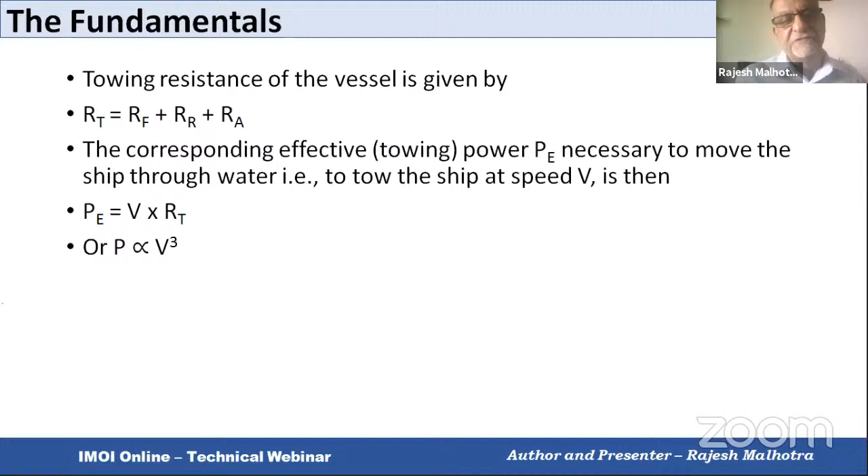You'll note from this that all curves plotted of power versus velocity will always be hyperbolas, never straight lines. We'll come to that later, but this is where we start - these are the fundamentals. Now we come to the proportions of the various resistances depending on the speed of the vessel. This is where it becomes clear that as the speed of the vessel rises, the proportion of wave and eddy current friction rises disproportionately. That is why the speed of the vessel is central to any discussion on power and propeller design.

For very high speed vessels - like hydrofoil craft - the propeller and hull design need to be totally different because they are high speed. In a high speed vessel, the wave resistance increases exponentially. As you can see, in a low speed vessel, frictional resistance forms 90%, while in a high speed vessel, frictional resistance is only 45%. The wave resistance changes dramatically as the speed of the vessel increases.

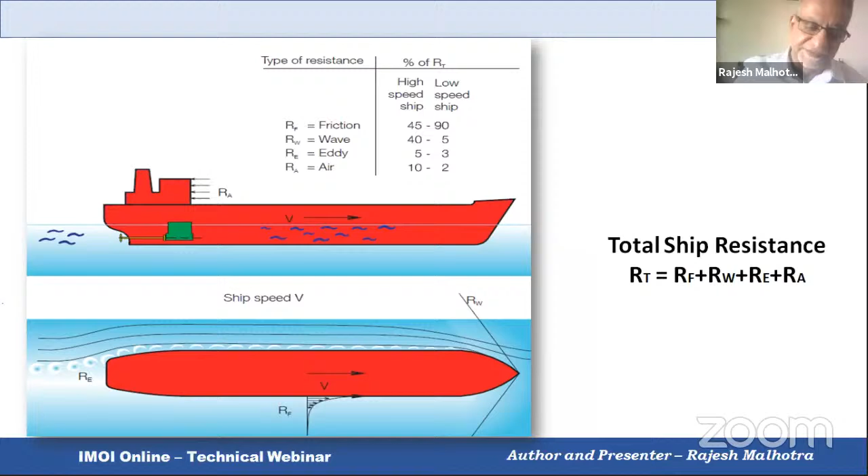Now this leads to something called a wave wall. If you see what happens here - if I increase the speed of my vessel - believe me, this is an actual 600 TEU container vessel. For a speed of 15 knots, the power requirement is only about 2,500 kilowatts. If I increase the speed to 17.8 knots, just an increase of 2.8 knots, the power requirement almost doubles. And if I increase it closer to 20 knots, even higher than 17.8 knots, no amount of increase in power is going to increase the speed of the vessel.

This is known as the wave wall barrier to ship speed. The only way to increase the speed of the vessel is to change the hull design, or what is known as the lines of the vessel. The underwater design of the vessel needs to be modified if you want to increase the speed, because whatever power or velocity you increase, the additional power is just going to overcome the wave resistance - it is not adding to the velocity of the vessel.

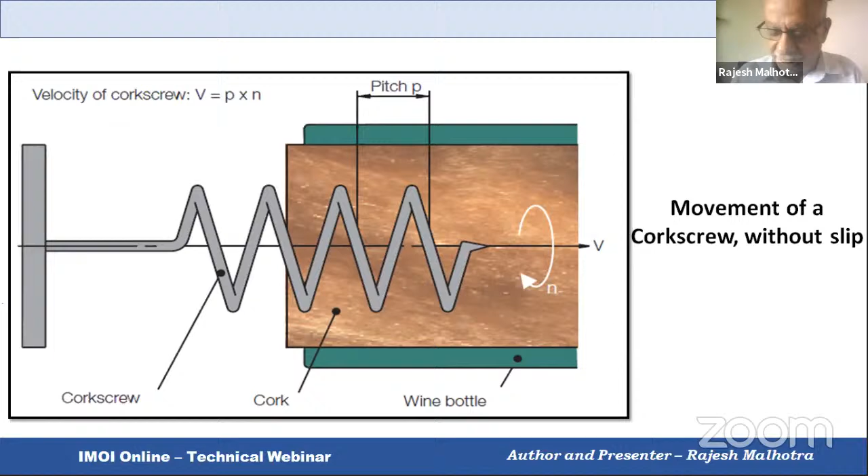Now I come to something which happens while the ship is in service. During propeller model testing and during sea trials, the condition of the hull and the propeller is that they are normally completely clean and smooth, there's no fouling on them. Also the condition of the sea during the trials is always calm sea. I mean, we always choose calm sea. No one does sea trials in sea of Beaufort more than 3. So this is what the situation is.

But in actual service, what is going to happen is that the hull is going to get fouled, the propeller is going to get fouled, you're going to get rough weather. Now, fouling and rough weather both have a certain effect on the ship speed, on the propeller speed, and obviously then the power developed by the engine.

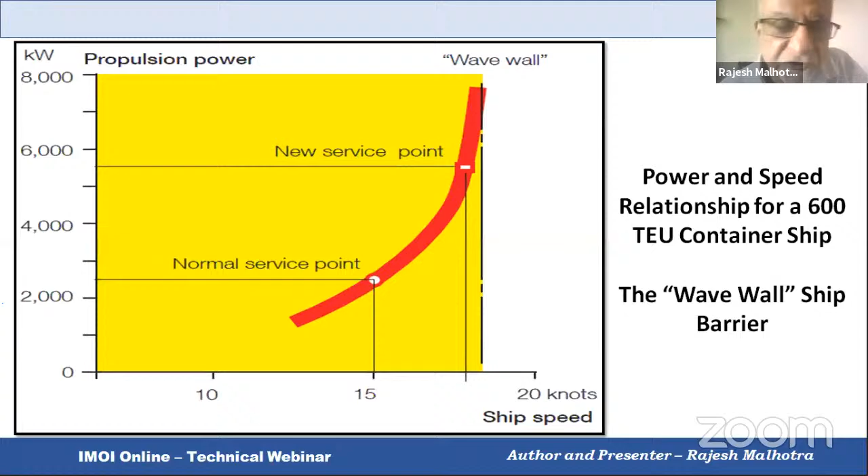Now, the general thing is what happens to this curve. Let me just go back here. Okay, what happens to this curve in rough weather, and when your hull is fouled and your propeller is fouled, is that this curve is going to move to my left. That means to maintain the same RPM, I would need to require higher power. Or if I'm delivering the same power, then the RPM is going to drop. That is what happens in rough weather or when your propeller and hull get fouled.

This is important to remember, that the curve is going to move to the left, because a ship with fouled hull will consequently be subject to extra resistance, which will give rise to what is known as heavy propeller running conditions. That is, for the same propeller power, the rate of revolutions will be lower, or to maintain the rate of revolutions, you would need to deliver a higher power.

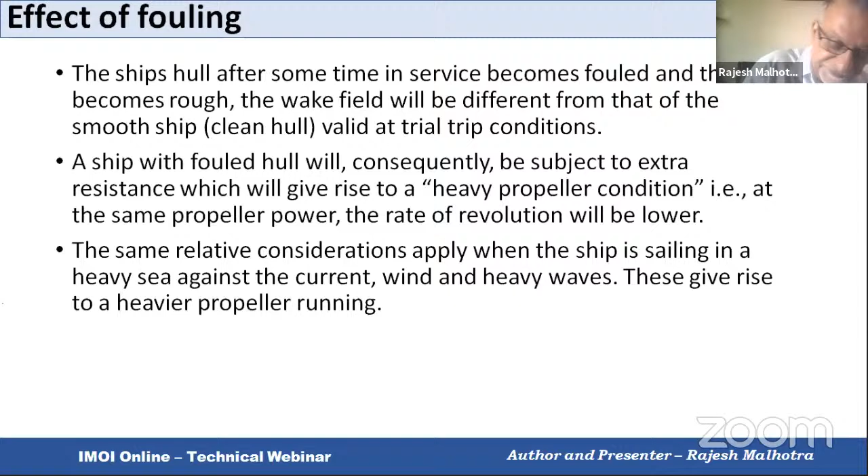And whether it is rough sea or it is fouling, the effect on the propeller, ship speed, and engine are identical. So these are actually treated the same way.

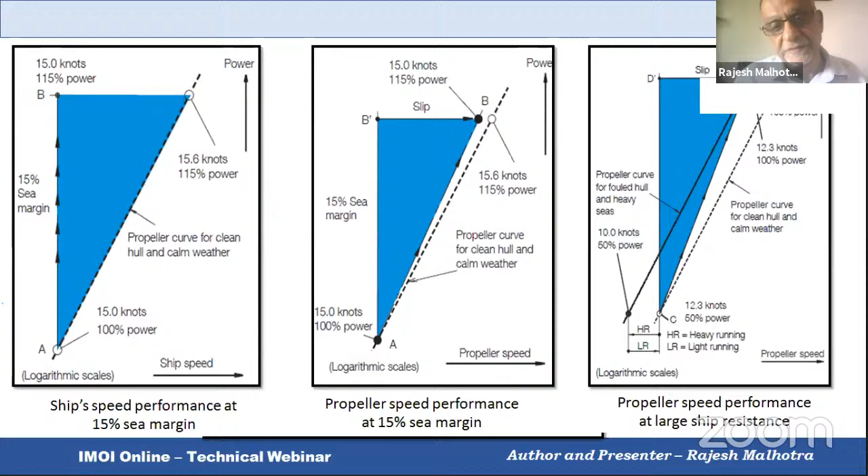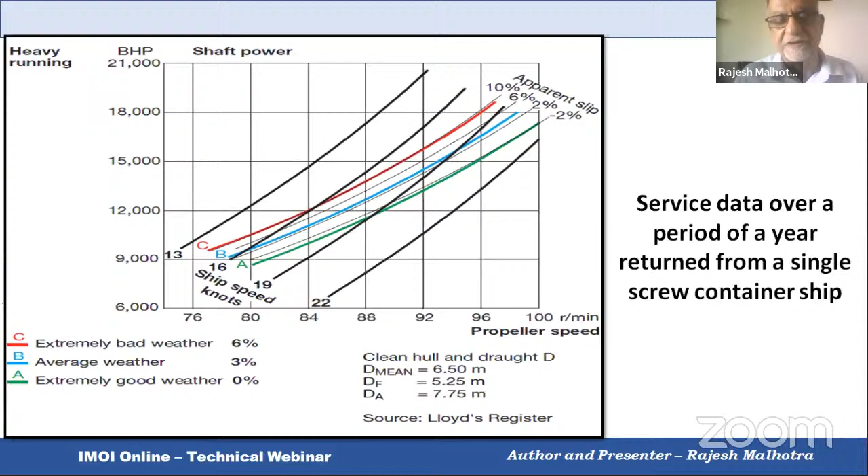The reason I put this slide here is to impress that actually all these lines would be curves, but we will be actually from here on dealing with straight lines, because we are going to use log scales. Now we actually come to part of the topic for the day: what are engine layout and load diagrams.

Actually, the power produced by any given engine depends on a constant - you all know the formula. The constant here is your stroke length and bore, and your mean effective pressure and the RPM. So the two variables in this formula are your mean effective pressure and the RPM. Now, the engine manufacturer has the freedom, from a given engine, to change both these parameters depending on the kind of service the owner wants.

He can either change the mean effective pressure, that would change your power, keeping the RPM the same, or he could change the RPM. Obviously, lower RPMs are preferred, especially nowadays where your propeller efficiencies and other things depend on having a lower propeller RPM. So you would like to have a lower propeller RPM, but in that case, to achieve the same power, you would need to increase your mean effective pressure.

Now, also, as per the propeller law, for engines coupled to a fixed pitch propeller, your brake horsepower is a constant multiplied by N cube.

That is your RPM cube, so that will be a hyperbolic curve. Your engine is actually directly proportional to the RPM, while your propeller is actually proportional to the cube of the RPM. So in general, what we can say is that the power is equal to a constant into n raised to I.

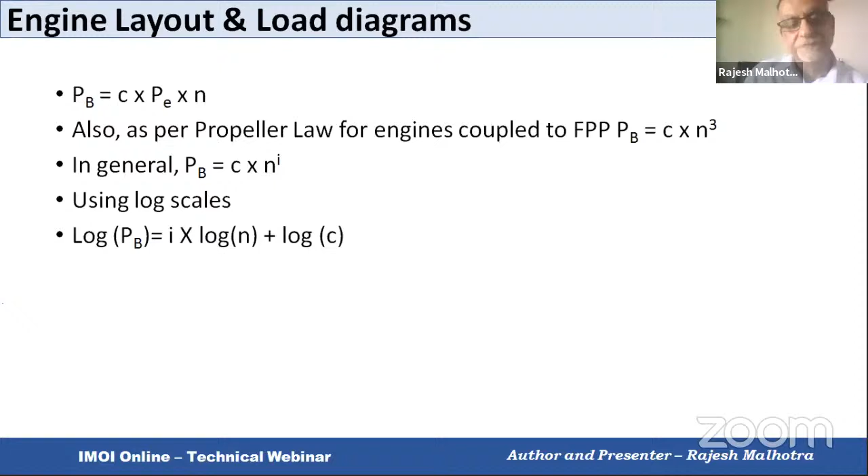Where I can vary from, say, 0 to 3 to 4, whatever you want. But if I use a log scale, then it becomes a straight line: y is equal to mx plus c. So whatever was the exponent I there, it would actually come as a figure for your x. Or it would come as a here. So this is what it is.

We are going to use straight lines and linear scales, the reason being it's easier to work with them, at least for me. What you must understand here is when I is equal to 0, that is n raised to 0, you would get a straight line parallel to the x-axis. When I is equal to 1, you get a straight line parallel to the line shown there. When I is equal to 2, you get a straight line parallel to the line shown as I equal to 2. And when I is equal to 3, you get a straight line parallel to I equal to 3.

So the point here is that your propeller curve will actually be parallel to the line I equal to 3, because it is n raised to 3. And your engine power curve would be parallel to the line I equal to 1, because in our plan equation it is n raised to 1. This is what is important when we start using log scales.

This is how we get the lines - which line is parallel to which one. You must remember that your propeller line will always be parallel to I equal to 3 generally, though it may be somewhere between 2 and 3. And the important thing is that your engine line will always be parallel to I equal to 1, because in your formula, n is raised to 1, right?

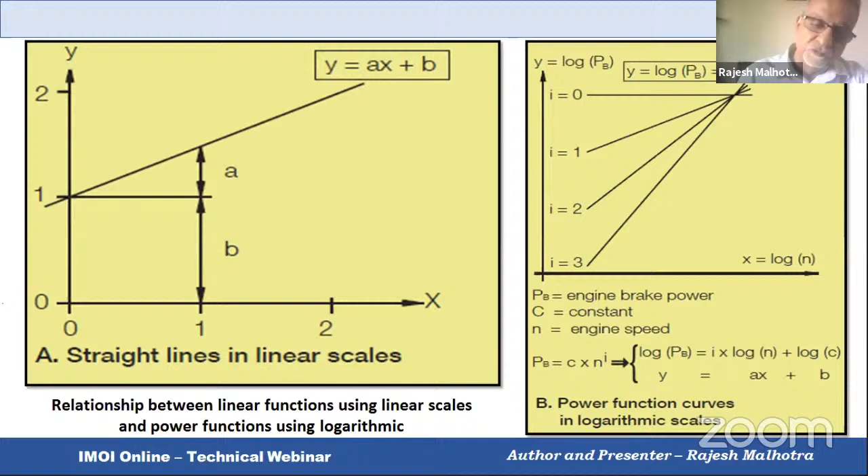Now we come to actual engine layouts. Before I start on the layout, let me explain something about how MAN B&W number the engines. For example, this is MAN B&W S70 MC-C8, Tier 2. Basically anything and everything to do with the power of the engine is in the specification. S is a super long stroke engine - if you look up your manual, you will know the stroke-bore ratio of your engine. S denotes a certain stroke-bore ratio.

Now 70 is the bore of your engine, so this is where we get the length and the area in your plan formula. N you get from these layout drawings, whatever is your RPM. In this case, for this particular engine, the maximum RPM is 91, and that is where you would get the maximum power. But you could also have an engine which will operate at 77 RPM. So the RPM is known, the stroke length is known, the area is known.

The only thing that is missing is the MEP. And if you can see here, it says MEP at the point L1 is 20 bar, mean effective pressure. That is actually also there in your specification - the number 8, the number after MC. You could have MEC8 also, but irrespective, that would be an electronic engine. The number there, 8, is known as the Mark number.

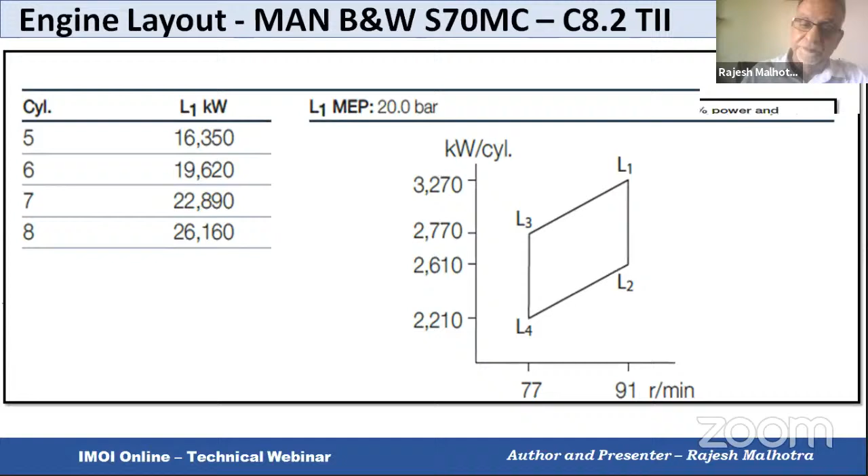So this is what a typical engine layout looks like, and MAN B&W gives you this for all your engines. If you see from this and the next slide, the MEP normally is between 80% and 100%. That means the difference between lines L1, L3, and L2, L4 is normally about 20%.

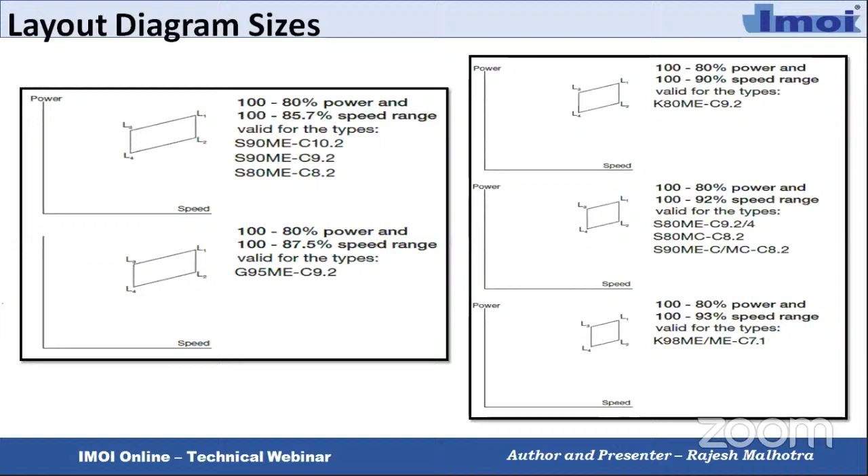So for all your engines, you have layout drawings like this. It is the job of the designer and the shipyard to select the propeller operating point, which is within this engine layout diagram. That is what it is.

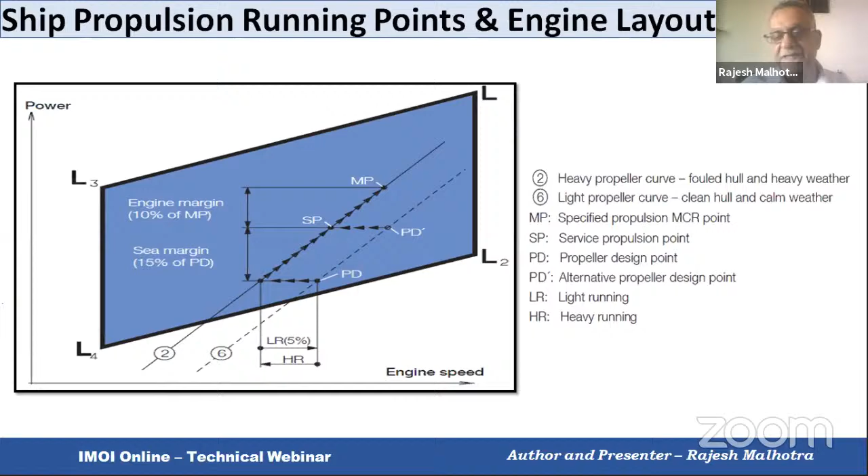Let me go into what is light running and heavy running so that everyone's clear about how these lines come about.

What is called your light running factor is actually the light running RPM minus the heavy running RPM, divided by the heavy running RPM, multiplied by 100. As I've been saying, this is normally between 3 to 7%, and in the middle it is 5%.

So the light running line I have got from my model test and my propeller test. That is from where I've got the light running line.

But what I'm going to do is draw another line parallel to the light running line, which is line number 2, which has got a light running factor of 5%.

Why? Because what happens is, to maintain the RPM of the propeller when there is heavy sea or fouling, I need to deliver more power to the propeller. So that is why I choose a heavy running line.

This is known as my heavy running line. In fact, when we were doing some of our other courses, people were asking, on some ships, what happens is the propellers got trimmed. The reason they do this trimming is to improve the heavy running performance of the ship or vessel. So they increase the heavy running margin by trimming the propeller in service.

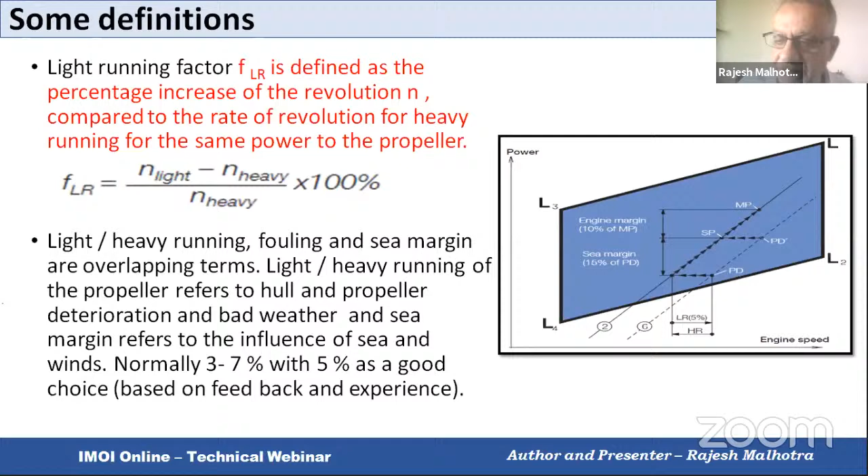So the first design point you get is your point called PD. Now let me go back to that slide. PD is your propeller design point, the combination of speed and power obtained assuming optimum operating conditions, that is clean hull and good weather, both theoretically and from the tank test. This is the point I'm going to get, and this is where my propeller and engine have to be designed.

But if I do it here, then there are no margins. So what I do is add a margin called a sea margin, meant for rough seas, and a 15% margin I add. The new design point that I get is shown as SPD or PD dash. That is my new design point.

But I'm going to transfer both these points to my heavy running line, because in practice I'm not going to use line 6 anymore. What I'm always going to use now for a ship in service is my line 2, which is my heavy running propeller line. So both these points are transferred to the heavy running propeller line.

And I get my first propulsion point, known as SP, which includes a 15% sea margin for heavy seas or propeller fouling or hull fouling. The other term for this point is the continuous service MCR, continuous service rating, CSR point. That is my point SP, which has got a 15% sea margin for heavy running and fouling.

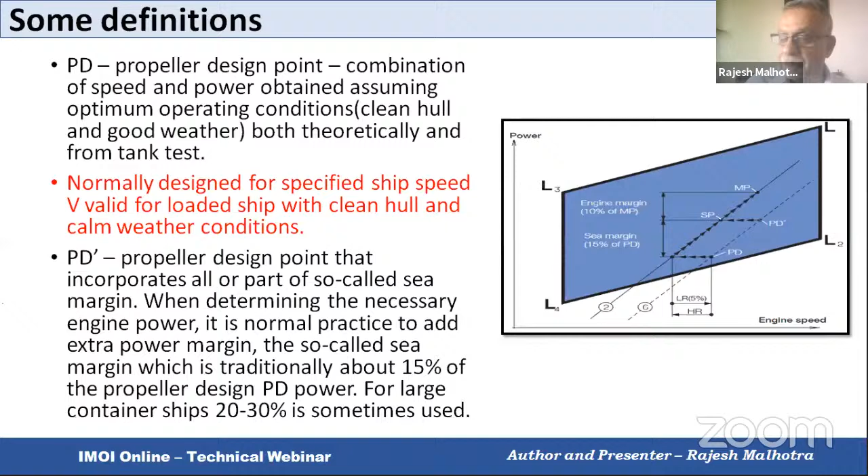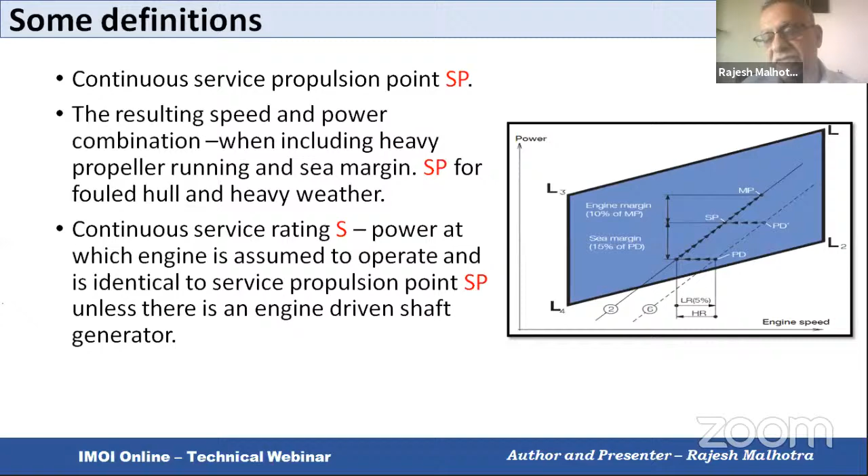The other point to remember is at which point do you get your most efficient specific fuel oil consumption, because that point is also important for us. The consumption of oil in the engine is equally important. So is it optimized at SMCR? Generally, no. The specific fuel oil consumption you get will never be optimal at the MCR.

In fact, you will find that on a ME engine, it is 80% of the SMCR, and for an MC engine, it is 70% of the SMCR. That is where your lowest specific fuel oil consumption is going to be, where your engine's fuel consumption is going to be optimized.

This leads to other issues because when you operate at slow running and other conditions, your SFOC may rise. You will not burn fuel optimally, but your total fuel consumption will still come down because you are generating lower power. So if you're operating at a point just above your blower cut-in points, your total fuel consumption is going to be very low, even though your SFOC is not optimized at that point.

And in ME engines, you can optimize it for high load running and low load running. ME engines are just brilliant - you can optimize your engines any way you like, and it is all done on a screen, if you know how to do it. It's not like the MC engines, where I actually need to take spanners and go change settings on my engine.

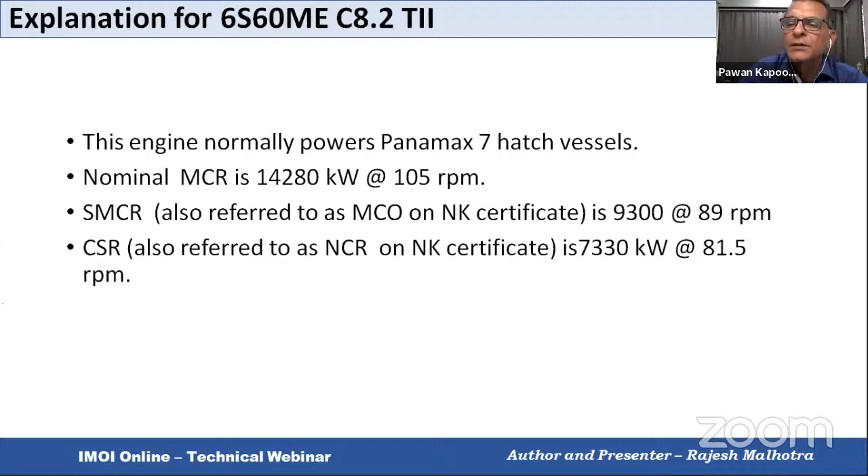There's a lot of detail about power developed by the engine that I didn't cover during my discussion. If I asked someone right now what the definition of mean effective pressure is, and the difference between mean effective pressure and mean brake pressure in bar, I'm not sure I'd get the right answer. So there's a lot to cover when discussing power developed by the engine, and the question on SFOC - how do you improve SFOC, balance power, what do you do first?

Whether you adjust the fuel racks first or adjust the timings first, and how is power balanced? Fuel pump timings - what is the effect of changing timings? Slow steaming without engine modifications, slow steaming with engine modifications, power limiters, EEXI, fuels, and turbocharging effects on power.

The MEP of the engine actually depends only on the fuel and the air. There's no other way of changing the MEP of the engine. You need to change the amount of fuel you're burning and how efficiently you're burning it. So turbocharging plays a very important part.

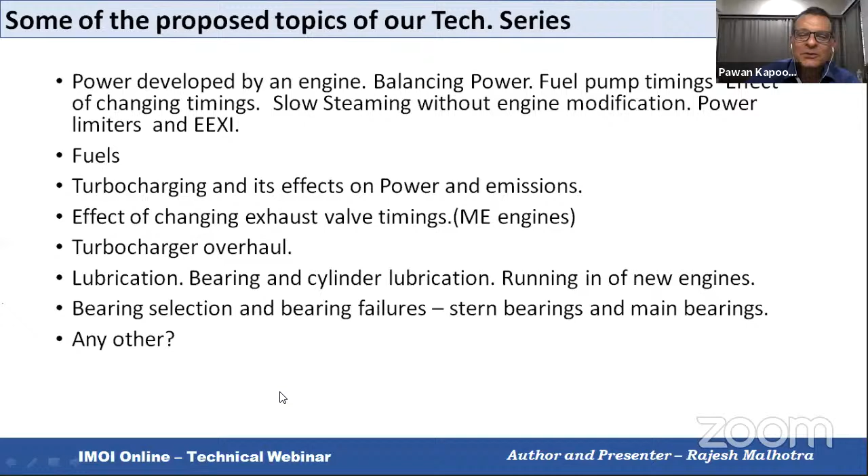Thank you, Pawan. Thank you very much. Thank you, that was a pretty nice session. Thank you, guys, thank you so much. Thank you so much, sir. Bye, sir. Thank you, Rajesh ji. Thank you, Pawan. Thank you, Rajesh. Thanks, very useful, thank you. Thank you very much, have a good evening. Right, thank you.